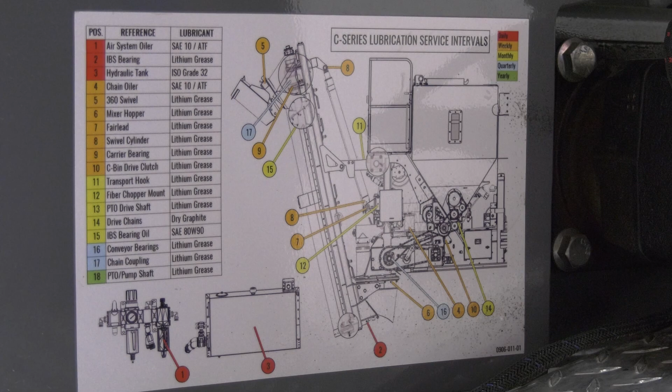Welcome to Service Plus. At the rear of the unit on the passenger side is located the lubrication and maintenance interval chart. You can use this as a guide to perform necessary maintenance items at the required times. Here we will go over the lubrication review, and the maintenance will be in a separate video.

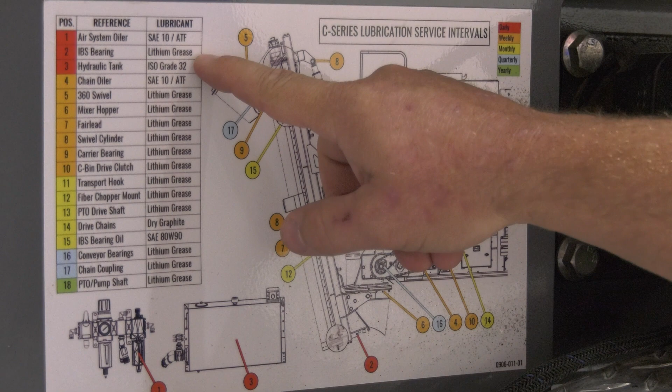We'll start with the daily maintenance items listed in red by greasing the IBS bearing. It is important that you put one pump of lithium grease into the grease point located at the back of the mixer every day before pouring concrete. This will help reduce the chance of bearing failure.

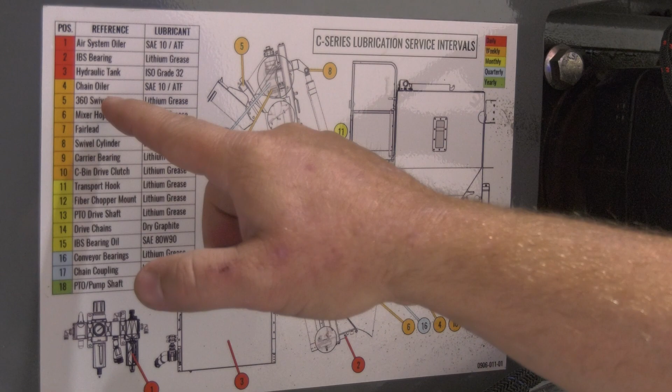Weekly maintenance items are listed in orange. We'll start by greasing the swivel chute with lithium grease. Note, not all units are equipped with a swivel chute.

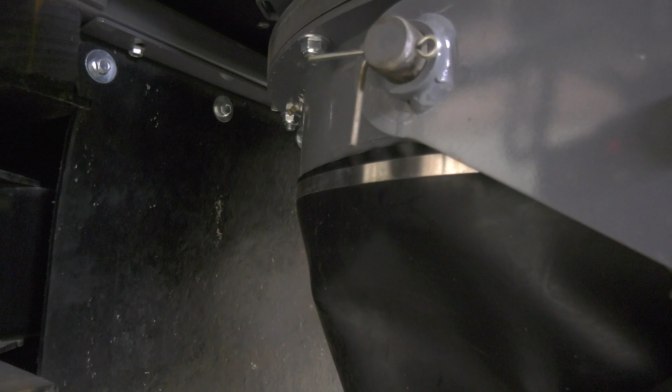Next on the weekly checks is to grease the mixer hopper swivel using lithium grease. Continuing with the weekly checks, you'll need to grease the fairlead with lithium grease. This grease point is located at the base of the hoist cylinder.

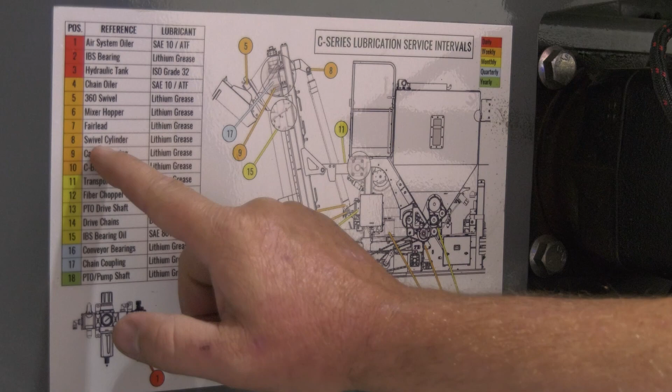Next, we'll move on to number 8 on the checklist, greasing the swivel cylinder with lithium grease. This grease point is located on the back side of the swivel mechanism.

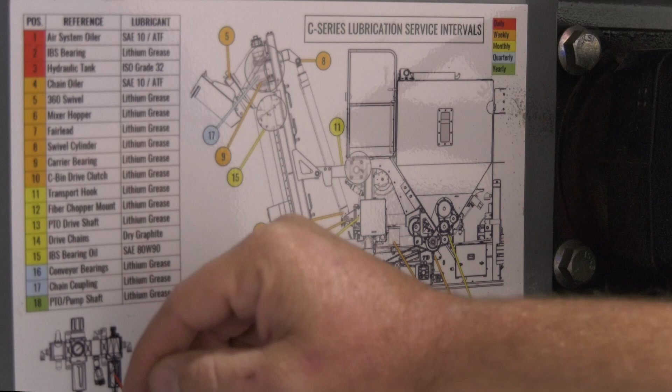Number 9 on the list is grease the carrier bearing with lithium grease. This grease point is located at the discharge end of the mixer.

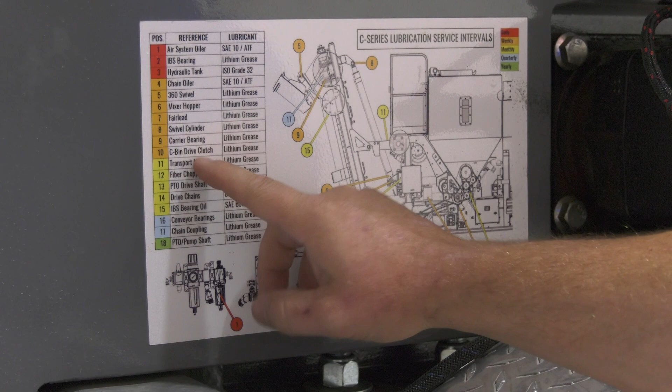The final weekly check is to grease the cement bin drive clutch with lithium grease. This grease point is located at the top of the cement bin selector handle. This allows the lever to move smoothly between the different speeds.

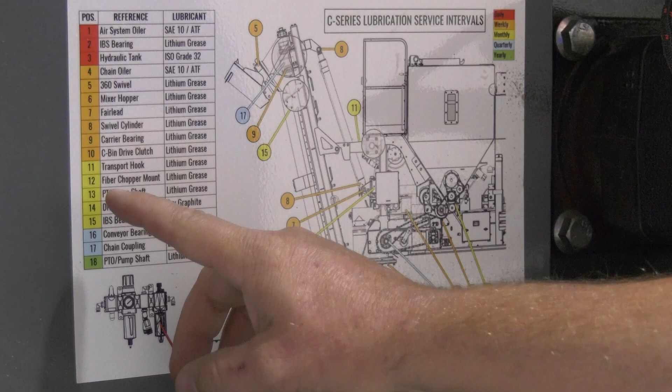Monthly maintenance items are listed in yellow. The first monthly check is to grease the transport hooks with lithium grease. This one grease point is located next to the platform support and feeds into 3 separate points on the hooks.

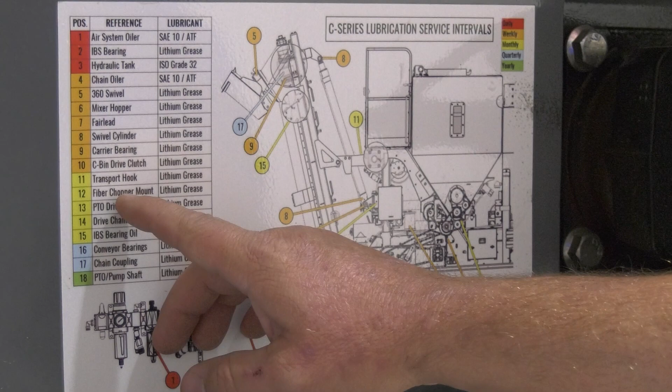Next on the monthly list is to grease the fiber chopper mount with lithium grease. This grease point is located on the swivel point of the fiber chopper.

Number 13 on the list is to grease the PTO drive shaft with lithium grease. You will find it located underneath the cab of the truck where the drive shaft connects to the PTO on the transmission.

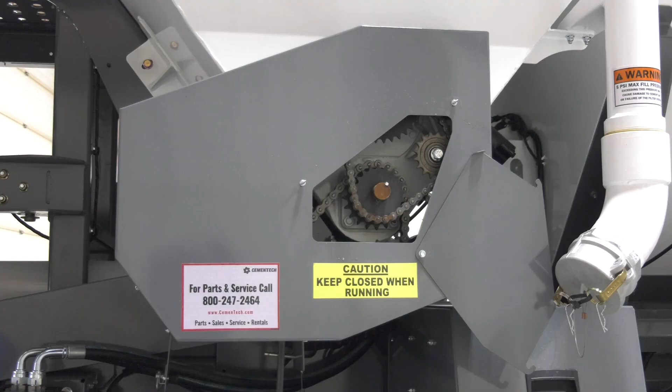The next monthly check is to lubricate the drive chains with dry graphite. All the drive chains are located underneath the cement bin behind multiple covers.

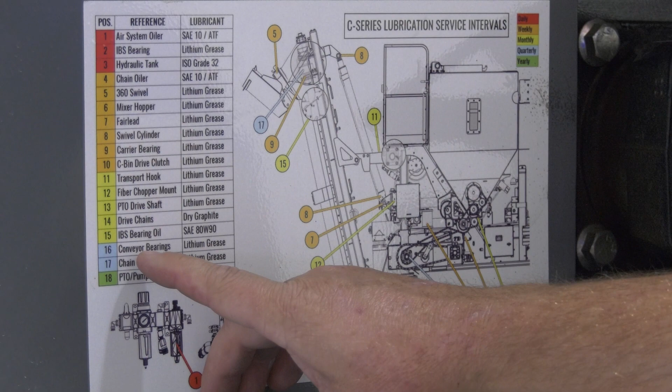Next up is the quarterly maintenance items listed here in blue. The first quarterly maintenance item is to grease the 4 conveyor belt bearings with lithium grease. These are 2 bearings at the rear of the unit beneath the covers and 2 bearings at the front of the unit.

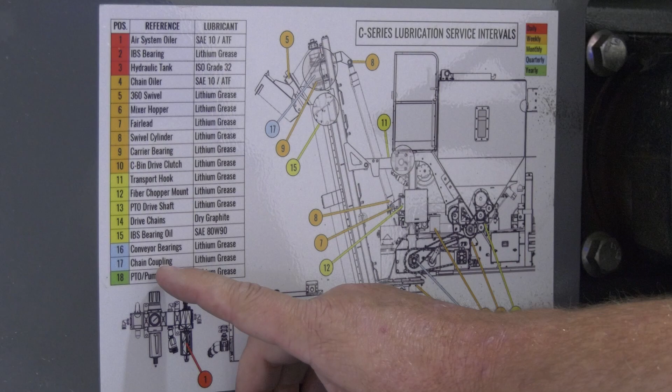The second quarterly maintenance item is to grease the auger chain coupler with lithium grease.

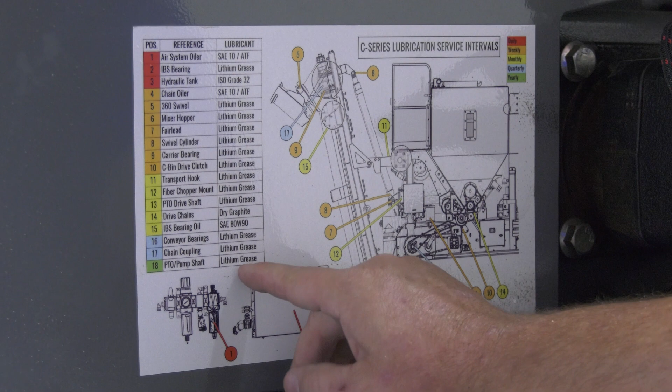And finally, yearly maintenance items are listed in green. The one maintenance item that needs to be checked yearly is greasing the PTO pump shaft with lithium grease. This is located where the drive shaft comes into the hydraulic pump and is typically underneath the water tank.